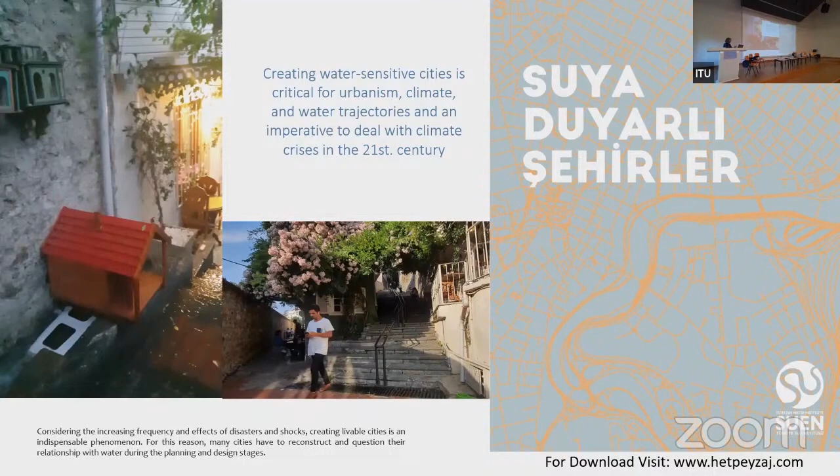What you are seeing in the middle is the street that I walk by every day to go home. This is a sunny summer day with all the begonias, the flowering shrubs opening their wonderful face, and this is a wonderful selfie spot. But as soon as the rain comes, this is the scene that we all have to suffer, or deal with, as the habitat of this built environment.

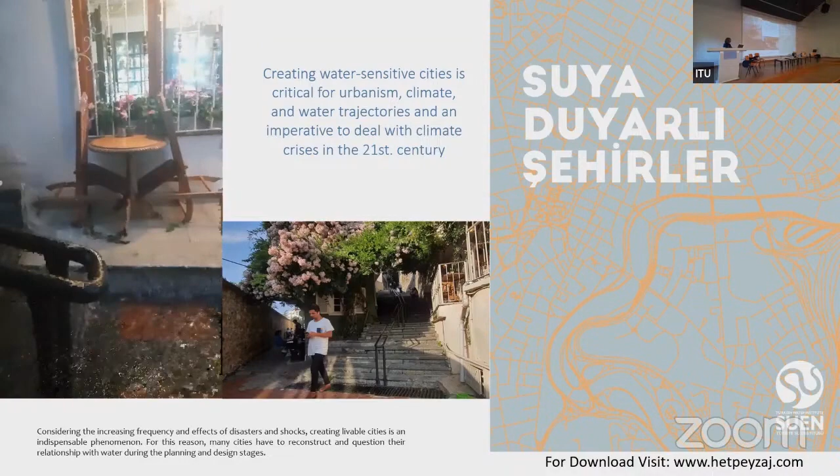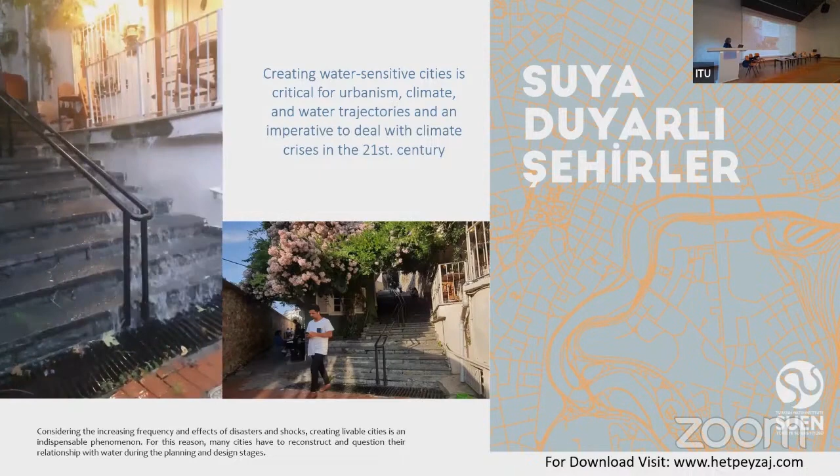So what we are seeing here is a rainy day, and what we are also watching is the wasting of a wonderful resource and incredible commodity in the urban environment, which is the water, rainwater. What we are also seeing here is the great infrastructure that modern cities, not only in Turkey but all around the world, rely on for many centuries to solve their runoff problems.

But considering the situation coming with climate change, the climate crisis, and how water is a scarce commodity these days, we need to see what's going inside of these grates as a resource, and then reverse this cycle so that we can reutilize this water again and again in a circular way in the urban environment.

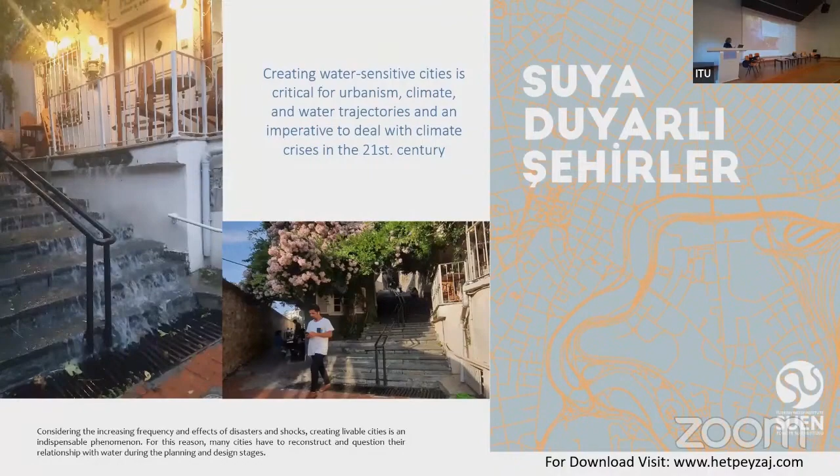This is important because cities are complex systems, where the natural and built environment is in harmony, and social, physical, and other types of conditions support each other in the city. Creating a sustainable city depends on understanding water and its relationship with water, and living in a healthier environment always creates this prospect, a progressive environment in terms of economy, social, and ecological relationships.

With the increasing effect of climate change and heavy sudden rains and long-term droughts affecting daily life and the economy more than ever, cities have to change their approach to water, becoming less on the gray side, but more on the nature-based and green side.

Some countries around the world have already developed their own scheme regarding the circular utilization of urban runoff in a more sustainable and nature-based way, and they all gave significant titles to this gesture of being sensitive with water.

For example, in China it's called sponge city. In the United States it's called low impact development. In the British sense it is integrated water management, and so on and so forth.

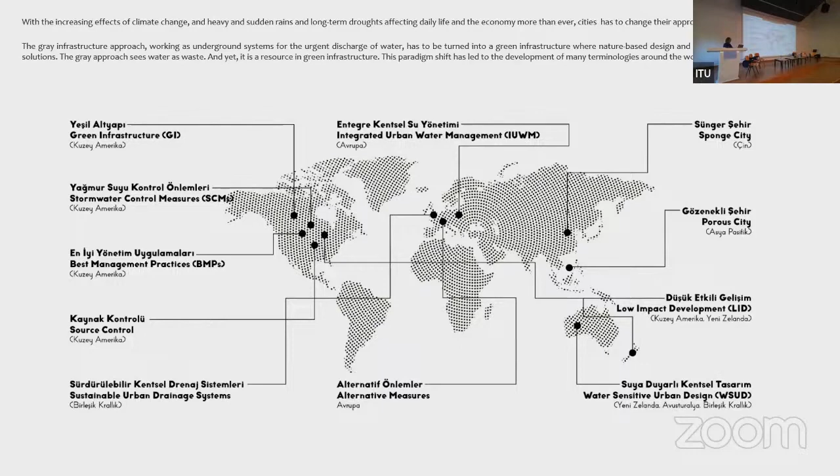So we need to come up with some form of understanding that in Turkey, we also need to be more sensitive when it comes to urban runoff.

These are examples of how the city can change the table to make the urban environment, especially the degraded brown urban environment, into a much more green infrastructure.

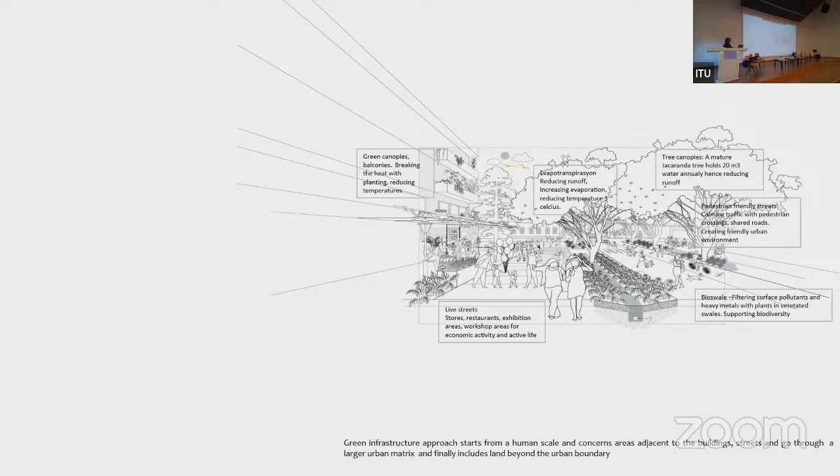It involves the buildings, the streets, and all these greenfield areas that we occupy as human beings in the city. Creating a resilient urban matrix against the detrimental effects of global warming is possible with the green infrastructure approach and water-sensitive design approaches.

You can see over here creating bicycle-friendly, not so vehicle-oriented streets with permeable materials, rainwater collection, and natural drainages.

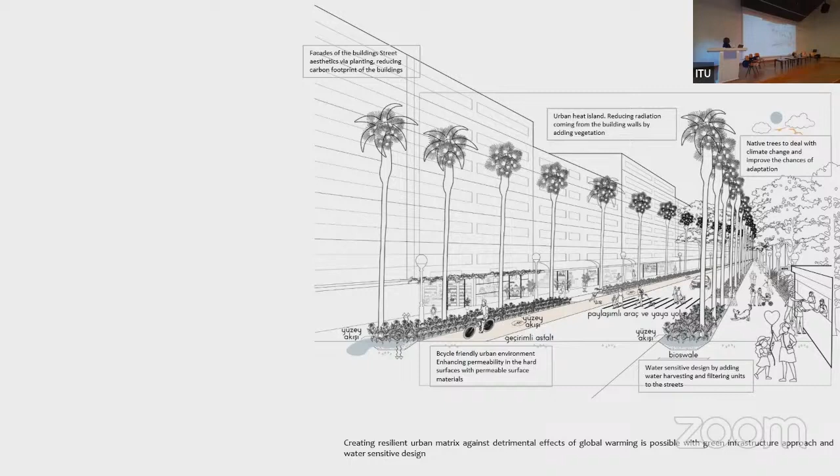And then the facades of the buildings, and the tops of the buildings with specific building materials. All of them create this circular environment where nature goes on and on in between the buildings and in between the elements of the public space.

In the climate change era, designing water-sensitive coastal systems is equally important. How fresh water and salt water merge with each other changes the city's resiliency.

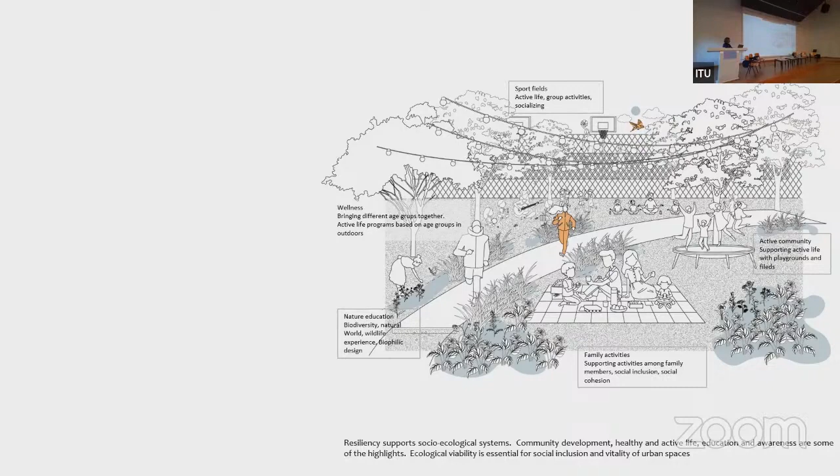We need to understand that resilience aspect not only in the sense of ecology, but also in social resilience. This is a social system also. What we design doesn't only support ecological resiliency, but social resiliency is important too.

Therefore, supporting this built environment doesn't only incorporate what's seen above the ground, but also what's below the ground is an intervention area.

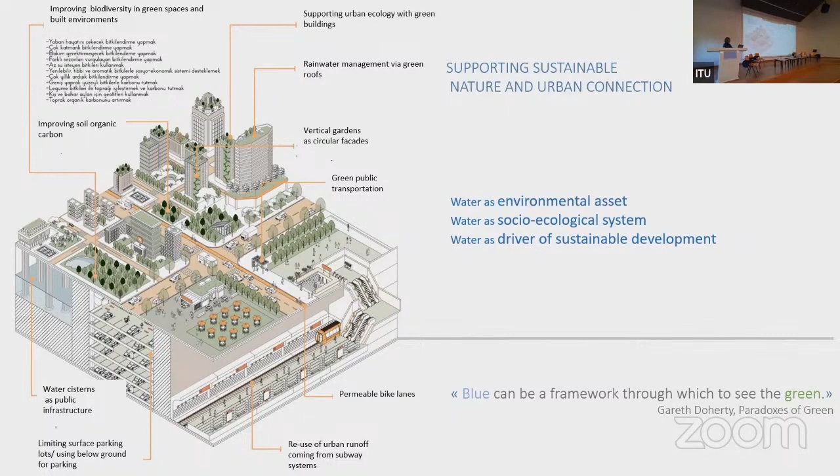Every layer in this section always involves some form of water, even in the metro lines and below the ground. So supporting the sustainable nature and urban connection relies on green infrastructure and understanding water. Gareth Doherty calls this whole system the 'blue frame,' the framework through which to see the green. So we need to put on our blue glasses when looking at the green system, because water is a driver of sustainable development, a socio-ecological system, an environmental asset, a source and regulator of this environment, a design motivation, a design input, and a design medium.

I will elaborate how these water-sensitive approaches can shape design decisions within a few real world examples that I have had the pleasure to be involved in. This is the Taksim area, with very harsh surfaces covered with granite, and the whole system unfortunately relies on gray infrastructure.

During its history, Taksim has gone through many different periods. The lifestyle, the way people engage with the Taksim area, changes constantly until nowadays. So there is this social fluctuation and human topography, as we call it, changing significantly—not only the natural topography, but the Taksim itself.

The translation, the meaning of Taksim, is 'water division.' It is just bringing water together and then dividing it to the neighborhoods of Istanbul, of Beyoğlu. The name takes its title from the Maksem building, the water division building located in the heart of Taksim, which we don't notice today, but it is there.

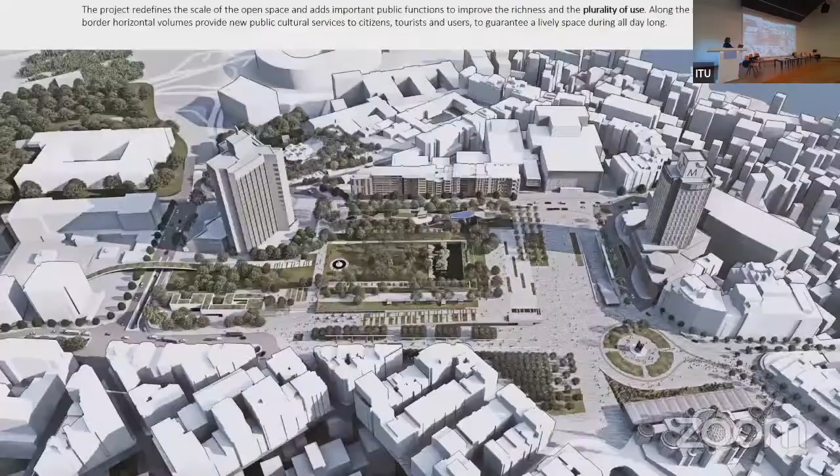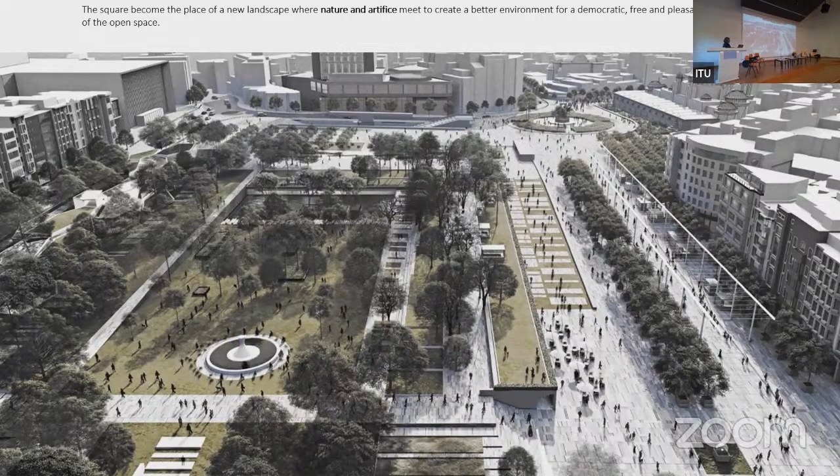Our project redefines the scale of the open space and adds important public functions to improve the richness and plurality of use. Along the new border, horizontal volumes provide new public cultural services and uses to guarantee a lively space all day long. So we were not only promoting this livelihood of activities, but also creating an urban environment that can capture more carbon than the whole built environment of Taksim is releasing.

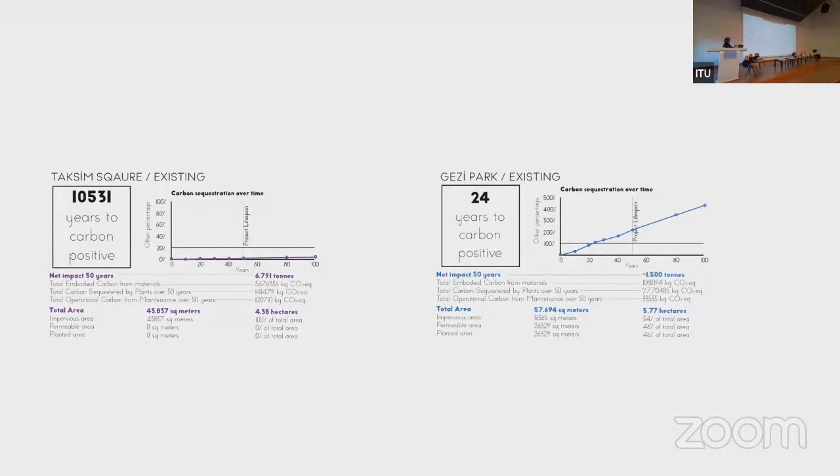The project redefines the scale of the open space and adds important public functions to improve the richness and use. What we did was measure the carbon situation and how many years, with the ongoing situation, it would take for Taksim to become carbon positive—meaning we'd capture more carbon than it releases. The calculations gave us more than 10,000 years, so it was almost like nothing. But with our design, we were able to reduce that down significantly, to almost 8 years.

So what we did to reduce this was utilize water. We use water to explain the identity of the space, which is Taksim, the confluence of the water. We proposed a scheme in the park saying, okay, even though we have to create these impermeable surfaces because this is a square and we need to protest, cheer up, celebrate, express our feelings, and socialize—millions of people will be there—so we need an impervious area somehow to hold all that people.

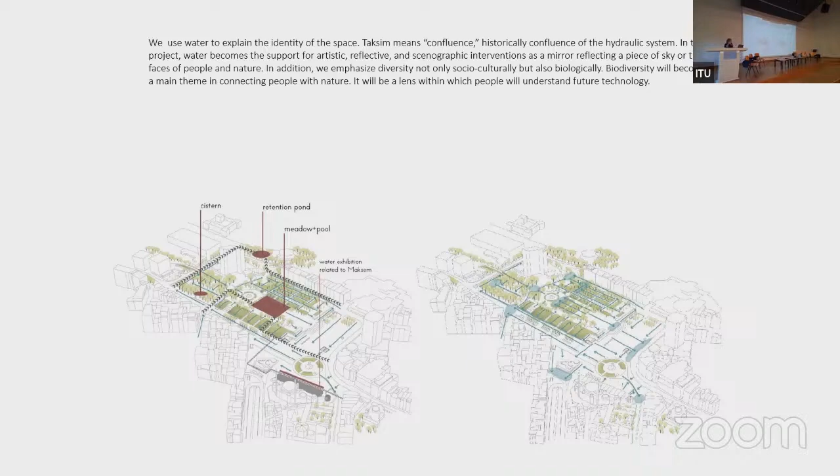But then the park right adjacent to that impervious area could be the hub of water collection, and with that water collection we can also regulate carbon sequestration. So we calculated the volumes of rain for every month and created a water reservoir area where all the surface runoff will go. In the rainy season, which is January, this whole area will be covered by water. But when it comes to July, the lowest season, that water will be inside the pool we are creating as a reflection pool.

That's kind of like paying homage to the people, because Taksim is also the area where we express our strong public feelings—so it's a reflection of our feelings onto the water in a more positive way. So this is the plan.

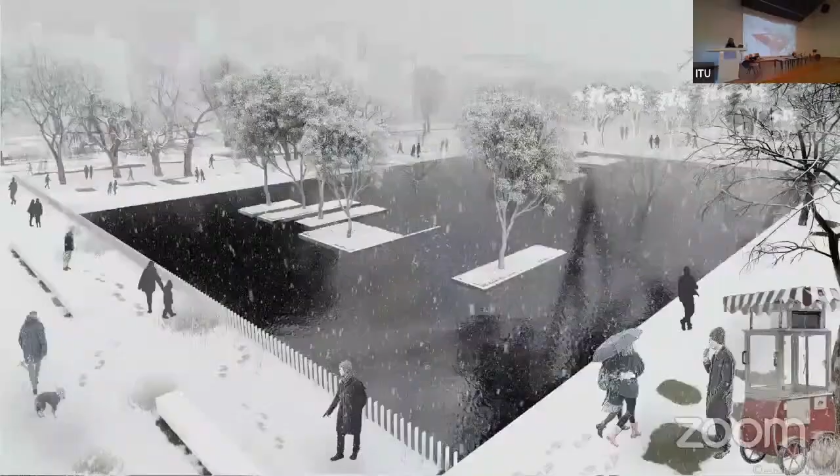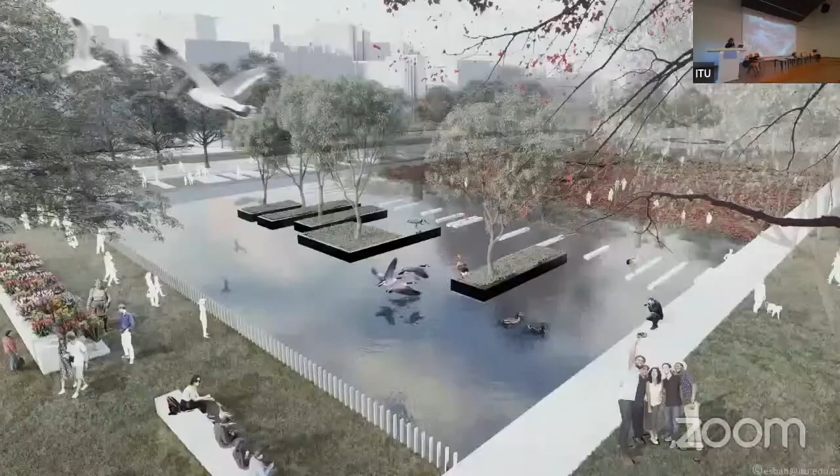This is the outcome of this whole measuring of carbon and runoff. This is the winter situation, when the site will be covered with water surfaces because we have a lot of rain, and we adjusted the size of this water surface to keep the water coming from all the impervious surfaces. When it comes to spring or the less rainy times, the water will go down towards the main area, and we will have a meadow—a wildlife meadow—which holds carbon more than anything.

So we also propose some light structured buildings, which educate people regarding the water cycle and also regarding the biodiversity in the Taksim area and in Istanbul.

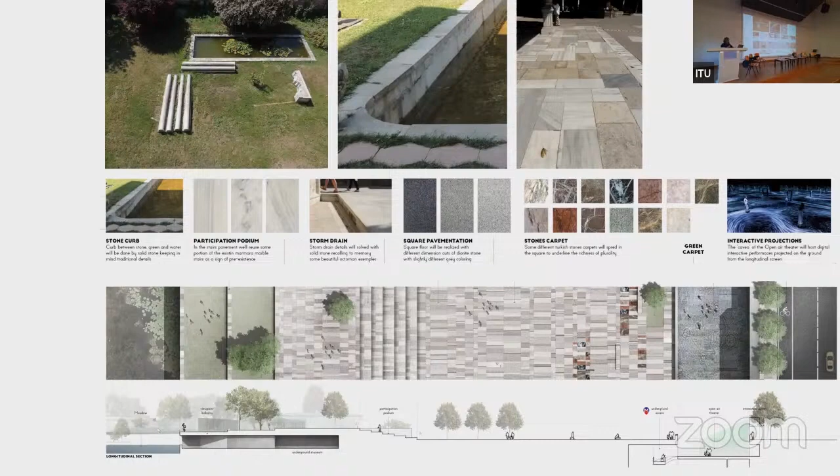Material-wise, the material language also takes its reference from the water, traditional water structures. In the Ottoman times, when you visit our historical heritage, you will notice there are different types of stones, the marbles coming from different geographies of Istanbul and Anatolia, expressing the cultural diversity and geographical diversity of the country. So we utilize that same concept to do the material work on the area.

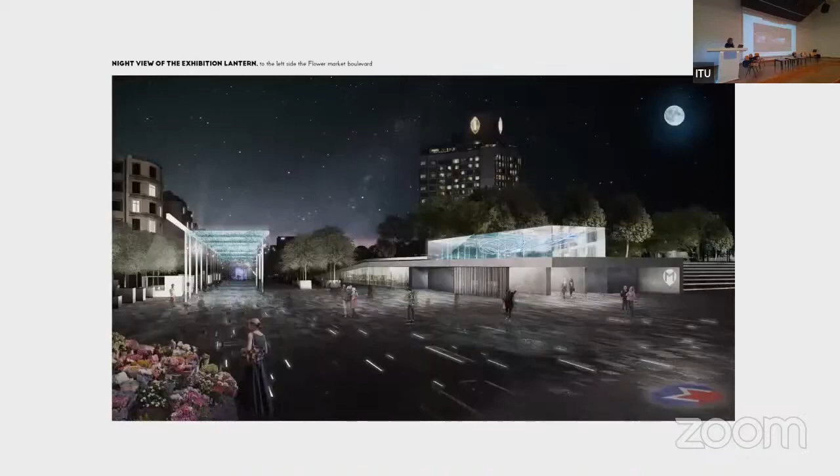So what you are seeing is like the entrances to the metro, where we are also utilizing light and the latest technology and sensors, which reflect the public's attitude in a really cheerful way, with sound and light and some sensors.

So this is an implemented project. This is a site where we are dealing a lot with the urban heat island effect, where all the grounds are sealed and the buildings get a lot of heat because the ground is very reflective. It's an asphalt, and it just hits the building.

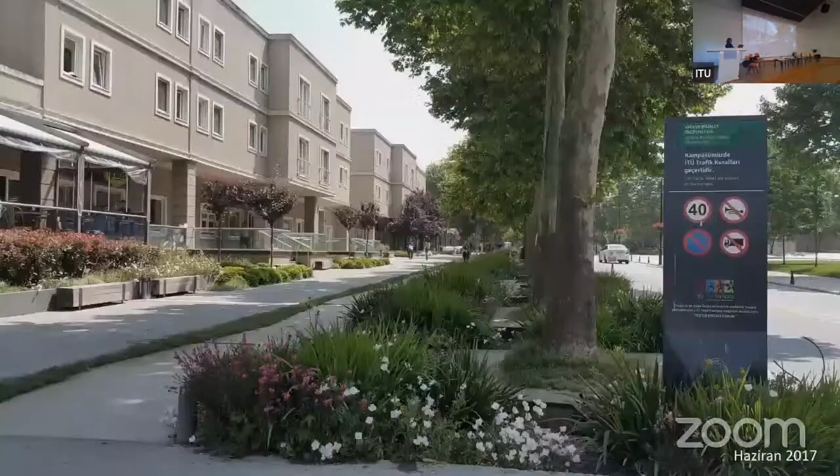This is the wintertime, and then next year the whole thing starts again. So this is before and after, and then at the end of the fall...

Water goes down to the ITU bay. And then we are using the topography to bring it to here.

There are no pumps, no electricity, nothing. It's just utilizing topography to bring it to the lower elevation, and then there is another way to fix the swale here. So that is a filter, another filter that we are putting, and then the whole thing is stored here as a reserve.

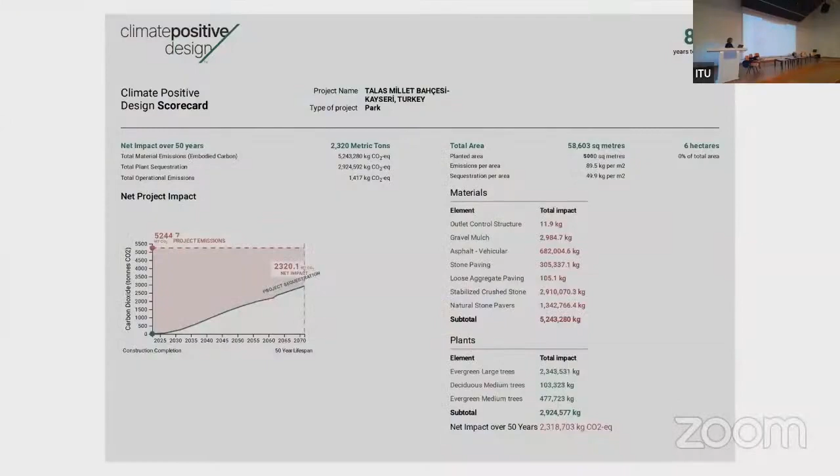Everything just collects here, and then we utilize this rainwater for the irrigation of the whole campus. So it's like, taking the positive side, that the water capturing and cleaning situation is really, really important and functional. So that's all I will say.

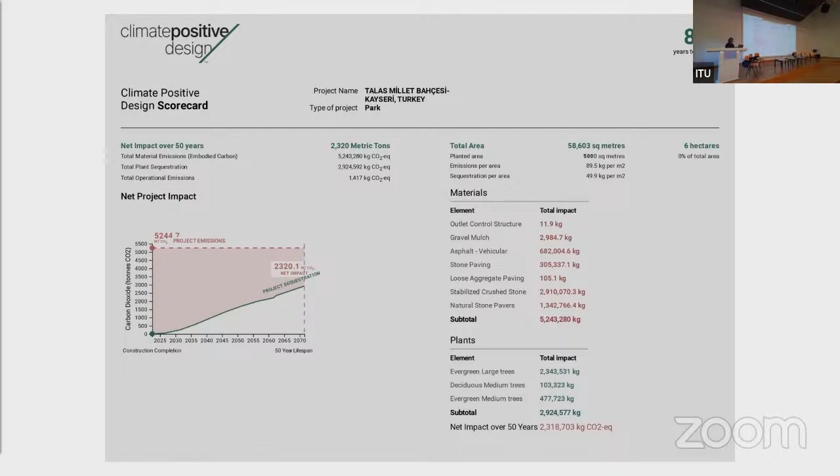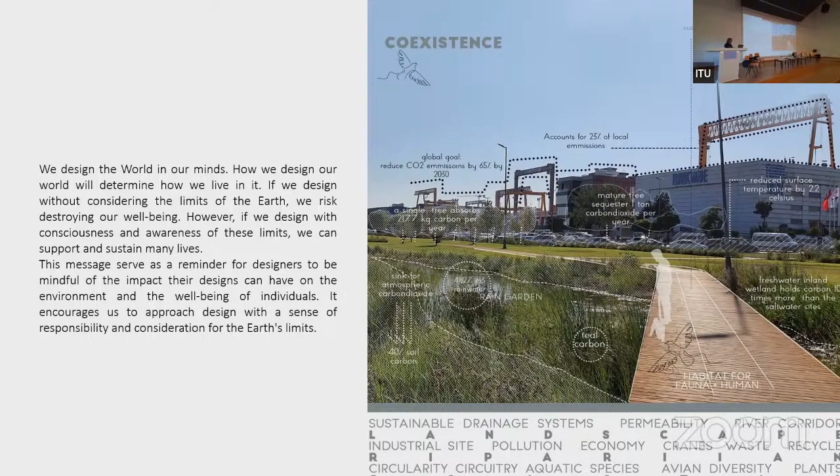What I will say as the last word is that we design our world in our minds. The way we design actually makes a huge difference. So when we design for the coexistence of people with nature and with the city, we need to be really sensitive, because how we design our world will determine how we will live in it. If we design without considering the limits of the earth, we risk destroying our well-being. However, if we design with consciousness and awareness of these limits, we can support and sustain many lives, and that is the end of my presentation.

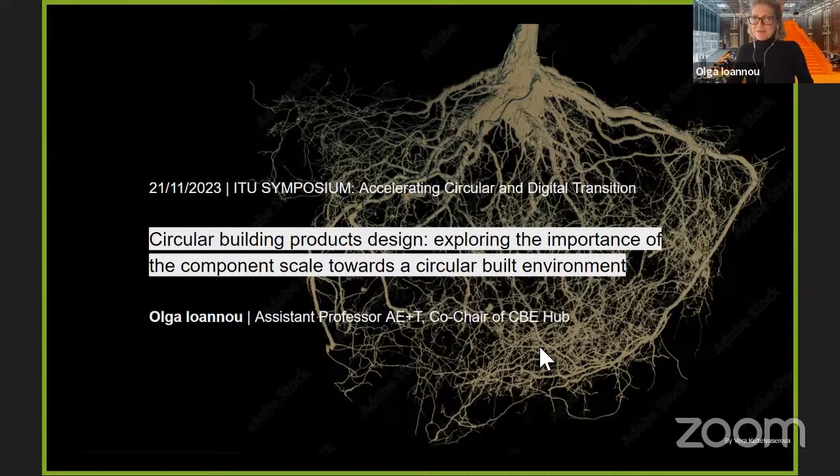So according to our emissions, all 47.9 billion tons of them, scientists have found that we need to decarbonize down to 2.51 billion tons a year, which means more or less a 96% reduction.

That would require not only the use of sustainable energy production, but also, what I claim in this presentation, a very systematic and rather systemic change.

But we are in this fragmented landscape of practices, where instead of looking at our current consumption and CO2 emissions, energy consumption, CO2 emissions, we find new ways of tackling the issue, like carbon trading. Many countries buy CO2 emission rights from countries that produce less.

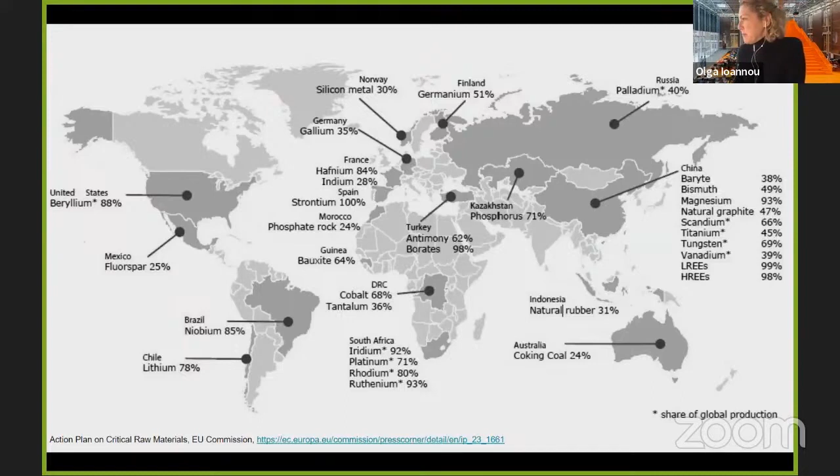This means that our decarbonizing needs in the West largely depend on mining that happens in locations other than the Western part of the world.

So what seems to be a very circular decision to use a timber frame window manufactured in the Netherlands ends up being highly dependent, highly reliant on so many different locations, from Brazil to Russia to Southeast Asia.

So there are material dependencies that obstruct our transition to a circular built environment. Currently, there are projects in the US, China, and the United Arab Emirates that require materials mined in one location, then transported to another to become components.

These materials are processed into components, and then for the fourth or fifth time, they're shipped to their final destination to become part of the project.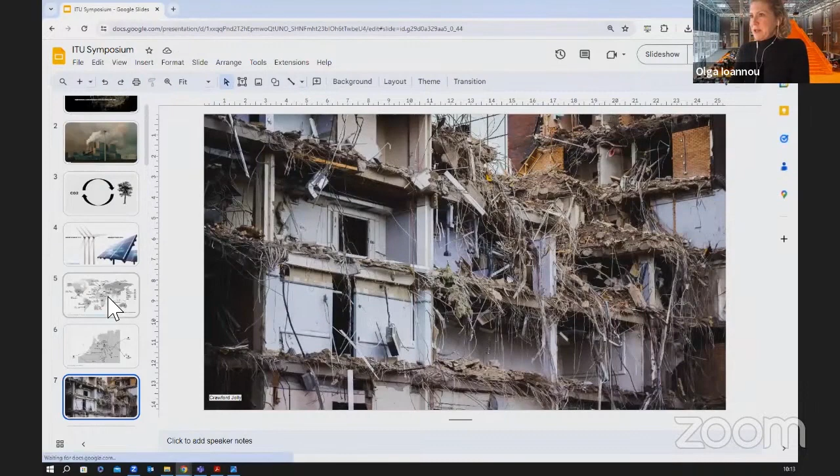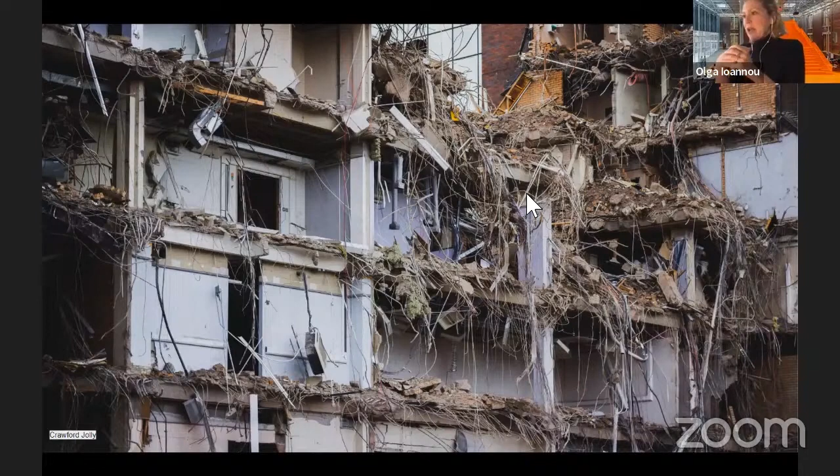Not to mention the fragmented ways we deal with waste, distributing it all over the world. I recently read that the EU has finally decided not to ship plastic waste over to countries like Malaysia or Indonesia, and instead to try to process plastic waste within the OECD partners.

So there are two major challenges here: decarbonizing on the one hand, decolonizing on the other, as a way to make this change more systemic.

Here at the Faculty of Architecture we have this group, the Circular Built Environment Hub. With this group, we've tried to create a tentative definition of what the circular built environment is, to practically describe what we mean by decarbonizing and decolonizing: trying to enable society to thrive within the planetary boundaries by closing, narrowing, and slowing down resource loops.

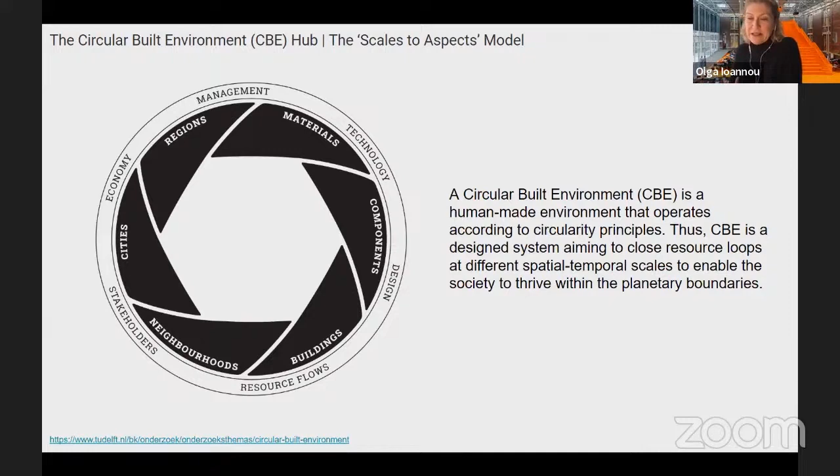What you see here on the left is the scales-to-aspects model we created, representing the scales we find relevant for the circular built environment, shown here as completely interlocked and interdependent. Around those scales is an equal number of aspects where we think circularity manifests in the built environment — management, technology, design, and so on.

One of the things we've realized over the past years of ongoing research is that the component scale, which is part of that diagram, is a very central, crucial scale to the transition. Mostly because the component scale is crucial to building-making, in the sense that materials and components will have to outlive the building they are part of. In a circular built environment, the value of the components and materials might outlive the very building, the form they make up for.

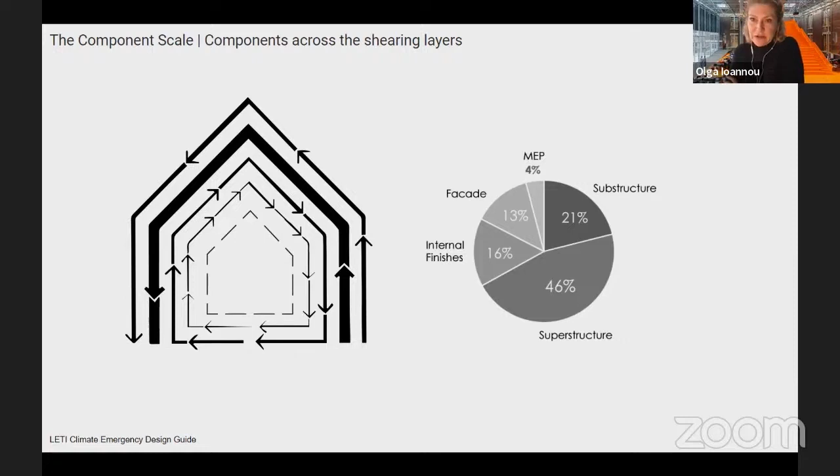And if we try to analyze the components per shearing layer, then we realize that even for a medium scale housing, there is all sorts of different parts we need to consider for a building, from the facade and substructure all the way to the internal finishes and the superstructure.

Now, depending on our strategy to make the transition of a building product or building component towards a more circular version of it, there is a number of domains being affected. And talking about systemic change, we cannot make this transition unless we set the goals, we set the ground for this transition. The domains we've identified as super relevant for the component scale are materials, design, manufacturing, and management.

Here I have this slide about setting goals, about making decisions with regards to the strategy we have in mind - to either use more biological materials and refuse the use of technical ones, or to even refuse the use of the component in the first place, all the way to creating tools like digital twins and material passports to help monitor and maintain a component properly to prolong its entire lifespan.

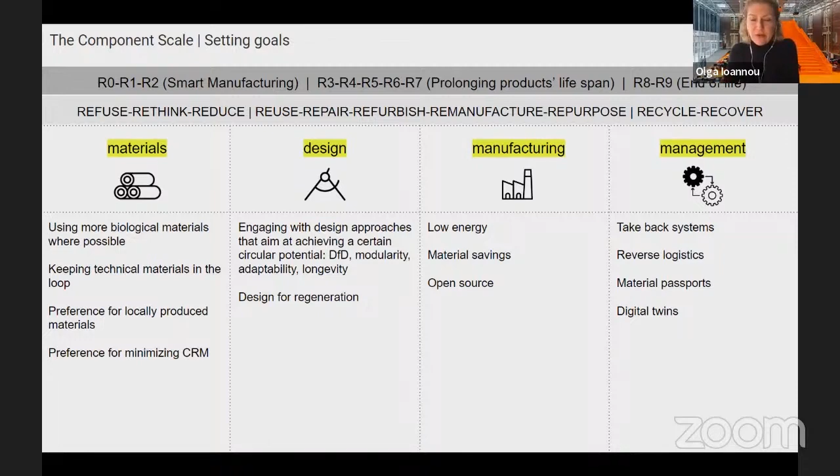But how can we make these domains more operational, with regards to how we teach about circularity, but also how we research about it? So we've turned these goals into questions, and developed what we sometimes refer to as the circular building product canvas. The canvas is composed of these four domains, and comes with lots of questions that either our students or researchers need to address with regards to making more circular building products.

These relate to the origin and nature of the materials used, but also the interfaces of those parts within a product, or the interfaces of the product with regards to how it's fixed on the building, but also how new technologies like additive manufacturing, CNC milling, and robotics can currently be employed to transition to more of a prosumer kind of user - someone who's more of a doer, who can have a lot of interaction within the activity of manufacturing the building product itself.

And of course, the domain of management looks into all these hidden systems - take-back systems, maintenance systems, or reverse logistics systems - that can help, like I said before, prolong a product's lifespan and allow for a second and third use in the future.

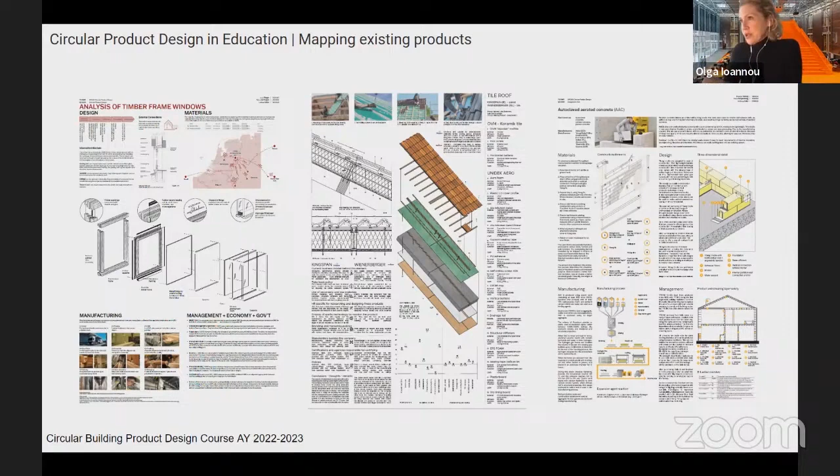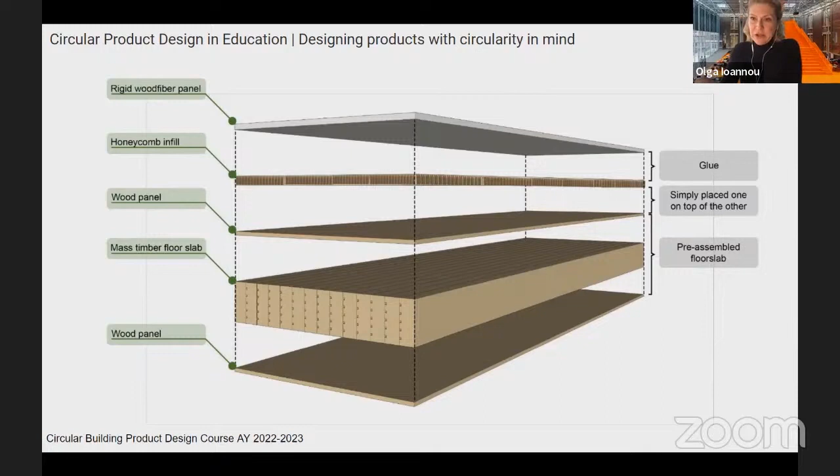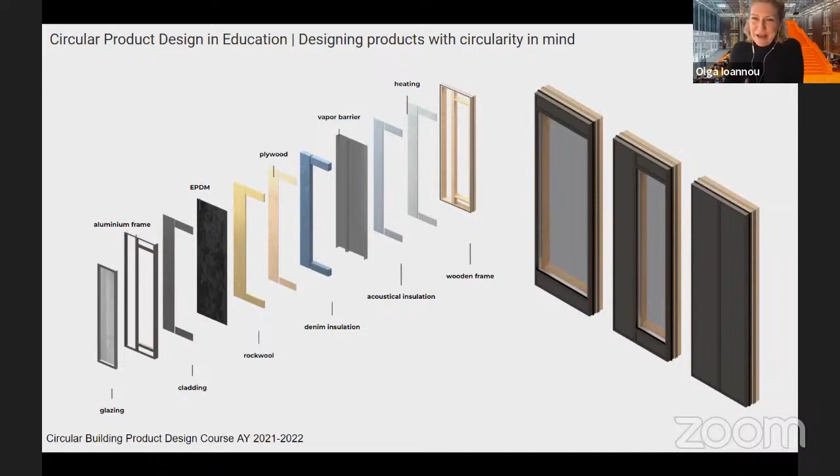And here you see different ways of delivering slabs or complete structural systems, where load-bearing walls use hemp-crete timber, or create new integrated design facades like this one here, where students need to identify the different layers within this facade and also identify the challenges of making it as circular as possible.

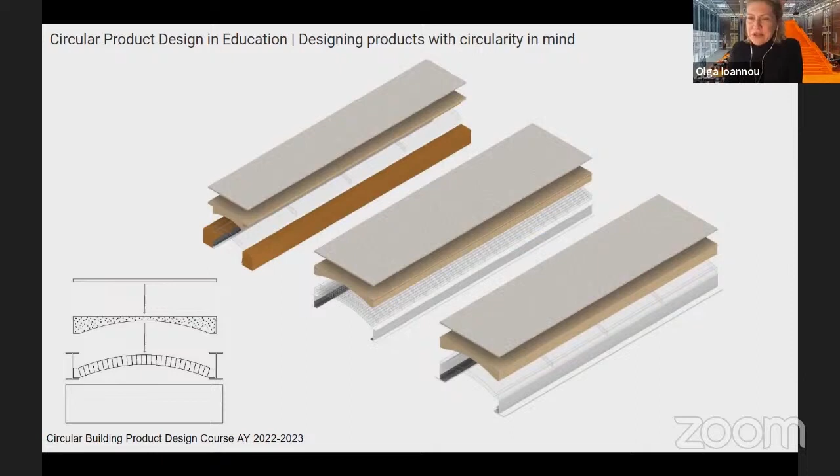The challenge is also reusing building components to produce new forms, therefore engaging in design for disassembly approaches, but also using materials in unconventional formats like bricks to create new arched slabs, for example, or by minimizing the impact of waste.

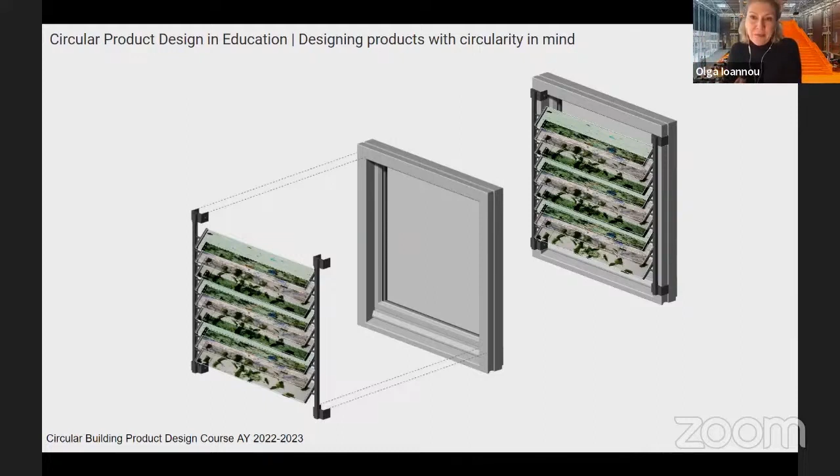There's also students looking into how waste can be turned into a resource and then aesthetically upgraded to producing something that, even if it's flawed, can create a new architectural vocabulary.

There is research currently on manufacturing techniques to minimize the number of molds needed to produce complex geometries. Here, the student has looked into this project using a bio-based material and has designed the facade element in such a way so as to minimize the number of molds needed without jeopardizing the complexity of the facade.

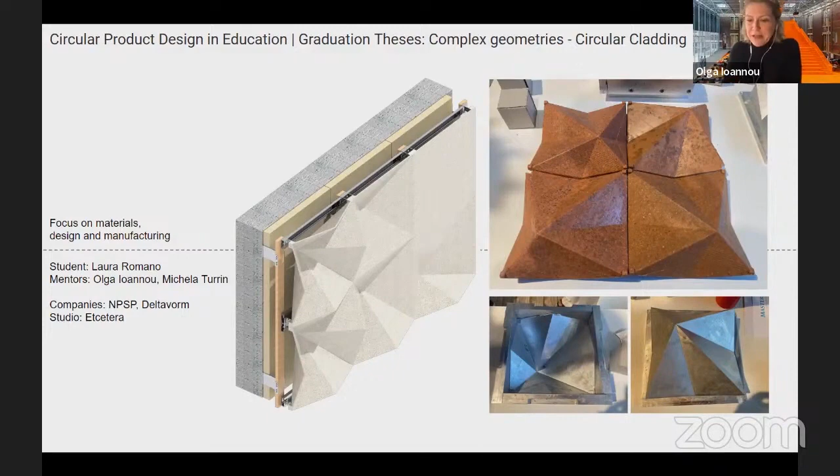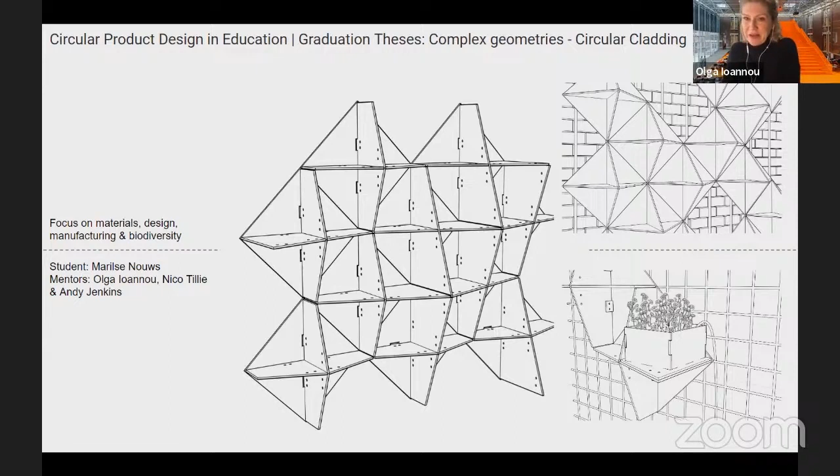There's students looking into biodiversity and how to integrate reused materials into cladding, also integrating biodiversity into it, also allowing for an easy disassembly that anybody can do by themselves.

And there are students that are currently looking into timber top-ups. There's been a recent policy here in the Netherlands to increase the number of timber top-ups in the country, also to increase the number of housing units created. Therefore, students are now looking into the possibility of structurally adding more floors to existing buildings, and what the right balance between deconstructing part of the building and adding new floors to it should be.

There's also students looking into waste produced by wind turbines in this case, making new structural systems out of blades that are no longer in use. So instead of landfilling this waste, creating crucial structural systems to integrate it in.

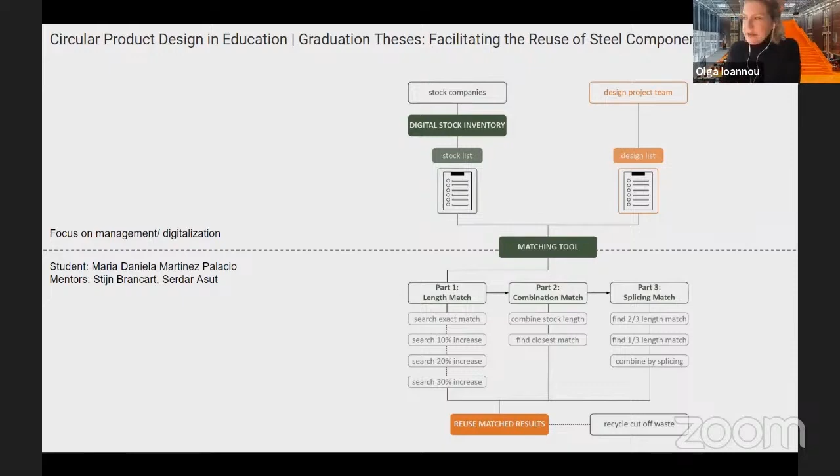And there's also students looking into digitalization and ways of making decisions about reused steel components, in this case based on their physical dimensions or properties.

And there is a number also of ongoing research projects with regards to facades and building components, and that is one of them. Juan has recently completed his PhD research, I think it was last June, on facade leasing. This is one of the most representative projects with regards to how systemic the change is.

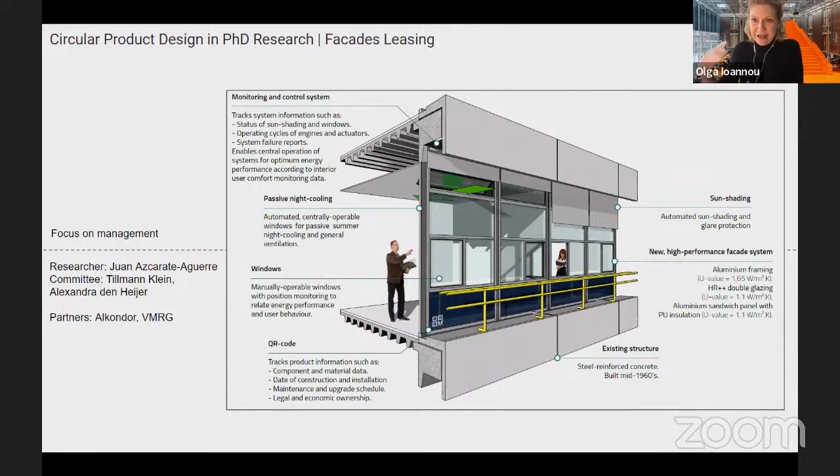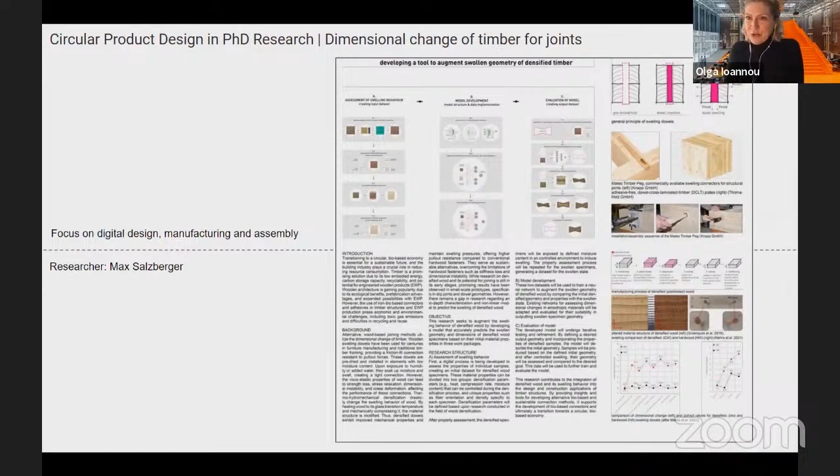There's also ongoing research with regards to timber. We also have a new timber professor here at the faculty. This is, in particular, a PhD research looking into ways of changing the dimension of timber joints by using humidity.

And there's also an ongoing research on the social aspects of circular transition with regards, again, to building products, and how communities gather around specific needs and co-create products based on resources that are directly available to them.

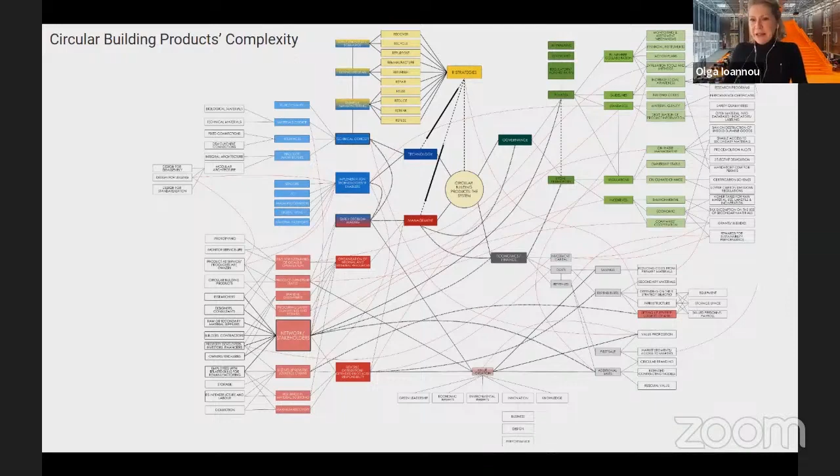The realization is, however, that there cannot be a transition to a more circular building product market unless we uncover those domains that I mentioned before, but also their interdependencies, and we make these interdependencies equally important to the products that come out of them.

Therefore, a complete reversal of the rhizomatic system, like I started and ended this presentation, showing that the process is as important as the product, and unless we actually address the complexities and the challenges of the process, we can never come to a wider

dissemination of products with a higher circular performance, with a higher circular potential. And we will remain fragmented, just like I've shown you in the first picture before. When we produced something, and maybe that is of value, but it's just a drop in the ocean of what is otherwise a major transition.

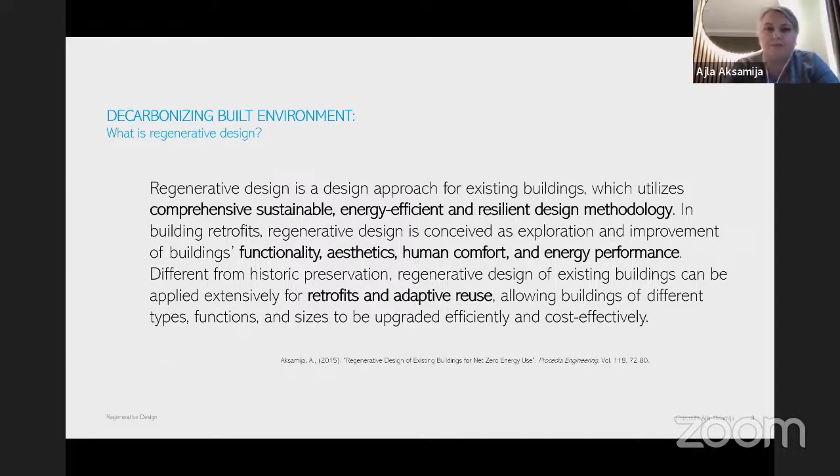In terms of resilient design methods for new construction as well as existing buildings, I typically like to talk about basic design methodologies. We always need to start with passive design techniques, considering building climate, orientation, thermal performance, shading, daylighting, and natural ventilation, and really try to maximize passive design techniques before moving on to advanced building technologies or renewable energy systems, because those are smart ways to design buildings, but also because of relative cost.

Passive design techniques do not cost any money, or they have relatively low costs compared to some advanced building systems, energy efficient HVAC, lighting systems, and so on. So we start with passive design techniques, maximizing their application on particular projects. Then we look at advanced building technologies, energy efficient lighting systems, energy efficient HVAC systems, and then renewable energy resources. This is the only way to achieve net zero energy in existing buildings, because if you simply start with renewable energy systems, we're completely missing the picture.

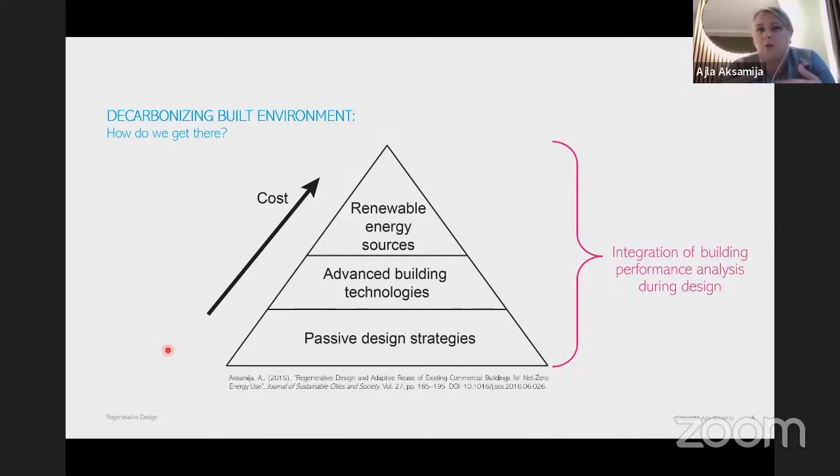Integration of building performance analysis is crucial during the design process and the regenerative design process, because we constantly need to check the impacts of our decisions, such as different passive design techniques, daylighting, shading, and improved thermal performance. We need to quantify the impacts of those design decisions on building performance, and then on advanced building systems and energy efficient HVAC systems, because if you are not integrating simulations and modeling in the design process, we simply don't know what we are doing. We do not know what the energy performance would be. So integration of building performance analysis during the regenerative design process is crucial.

Also, in terms of advanced building technologies, it is currently possible to achieve net zero energy in existing buildings as well as new construction, but we always need to consider costs, as well as benefits and risks. Integration of building performance analysis is important when analyzing advanced building systems, such as different types of renewable energy systems: photovoltaics, wind turbines, biomass heating, advanced facade systems.

Advanced HVAC systems, for particular sets of constraints associated with a single project - we might have specific benefits as well as risks that need to be considered. Again, integration of building performance analysis can help us make educated and the best design decisions that we can make.

So now, because we have limited time, about 15 minutes for each presentation, I would like to be very brief and present a case study. This case study is a regenerative design for a net zero energy academic building located at University of Massachusetts Amherst.

University of Massachusetts Amherst is located about 90 miles west of Boston, so it's a heating-dominated climate on the east coast of the United States. The UMass campus is fairly large and houses more than 30,000 students. This is the campus map.

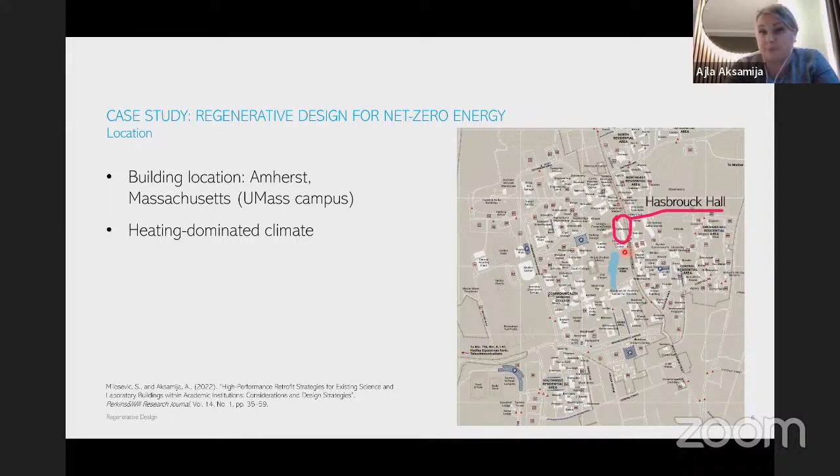The building includes an auditorium, classrooms, as well as research labs. What's also crucial is that this is the main pedestrian path and main circulation path through the campus, currently used by pedestrians to connect the east part of campus to the west.

On this side, the building has two or three floors; on this side, there's basically one level change. So students, faculty, and staff walk through this building to access the western part of the campus.

The building you can see here is a high-rise campus center, student union, and administrative building—a central location of the campus. Our challenge was to consider the existing conditions of the building and see how we could improve building performance with regenerative design.

We first looked into climate conditions to determine the right passive design techniques, understanding shading, orientation, and daylighting. On the western side there's a high-rise building relatively close, so we wanted to understand its shading potential, as well as solar exposure for a potential photovoltaic array on the rooftops. Analyzing climate and passive design techniques was the first step of the process.

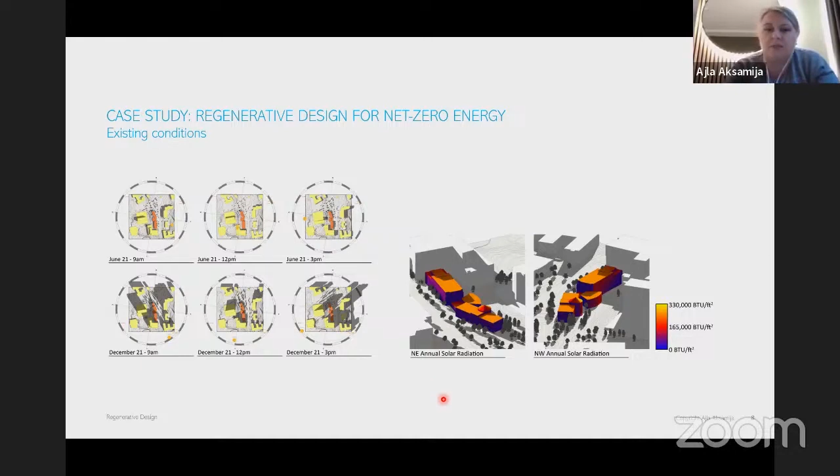Then we analyzed existing design conditions, looking into existing construction documents and conducting observations of how the building is used by students, faculty, and researchers. Interestingly, the addition building has essentially no windows—there's a glazed section on the first floor, but the research laboratories are completely enclosed. It was built in 1974, and I'm not sure what the design thinking was, but there's no daylighting whatsoever.

There's also no insulation in the exterior walls. In the original building from the 1940s, there are existing single-glazed windows, and currently students use aluminum or plastic film to protect the space in wintertime because it gets quite cold.

Circulation through this place to the western part isn't very easy or accessible, and there are also a lot of code issues—compared to current code, the building doesn't meet many requirements.

So we looked into the existing orientation, programming, planning, and use and functionality of the space, and proposed better, improved regenerative design strategies. This axonometric shows the regenerative design strategies that were used.

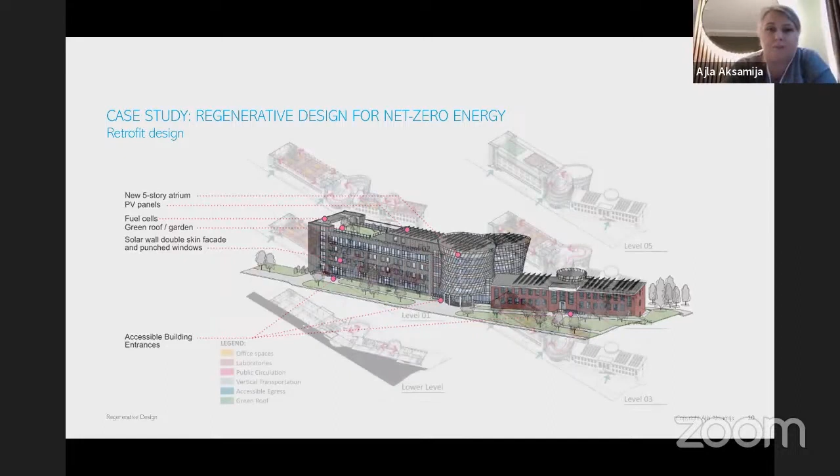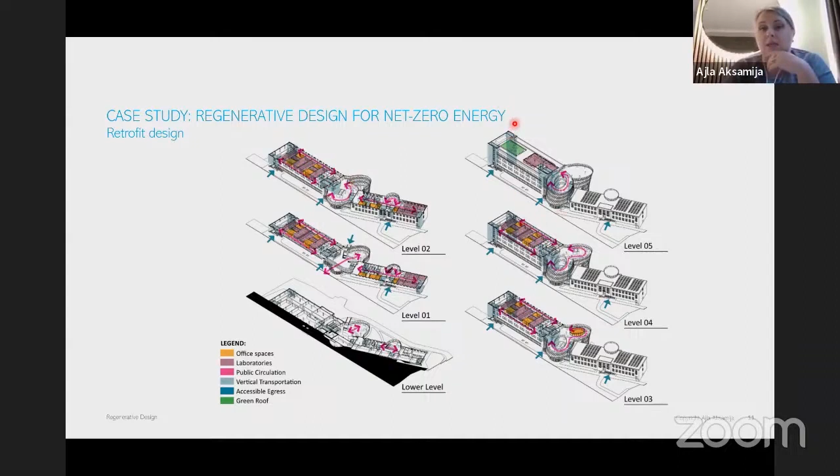Here are diagrams showing different levels and improvements in circulation and reprogramming. We pushed research laboratories to have access to daylight, and you can see circulation through the atria and connection to the campus.

We also modeled the energy usage of the building under the current design and compared it to the actual energy consumption data. We then conducted energy modeling of the retrofitted or improved design. The initial simulations gave us an EUI, or energy usage intensity, of 139 kBTUs per square foot—I'm sorry this is in imperial units.

The actual EUI was a little bit higher, 154. And we always have to take results of simulations and modeling with a grain of salt - it's highly unlikely that we will get 100% correct simulations. When we improved the building performance with the retrofit design strategies, our EUI was 126.

We also conducted thermal imaging of the building facades. As I said, winters in the northeast US can be quite cold, so this shows thermal imaging in January. I mentioned that the addition building built in the 1970s is basically just concrete and brick facing - no insulation, no windows, very poor performance. The existing building built in the 1940s had some insulation and exterior solid walls, but the windows were pretty problematic.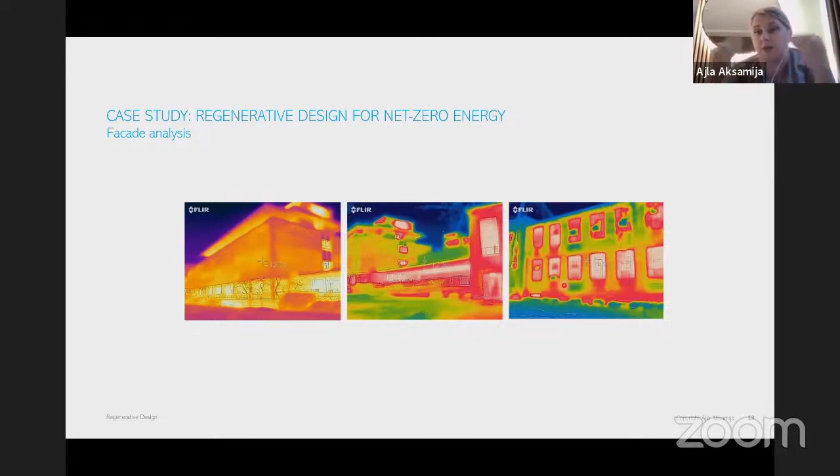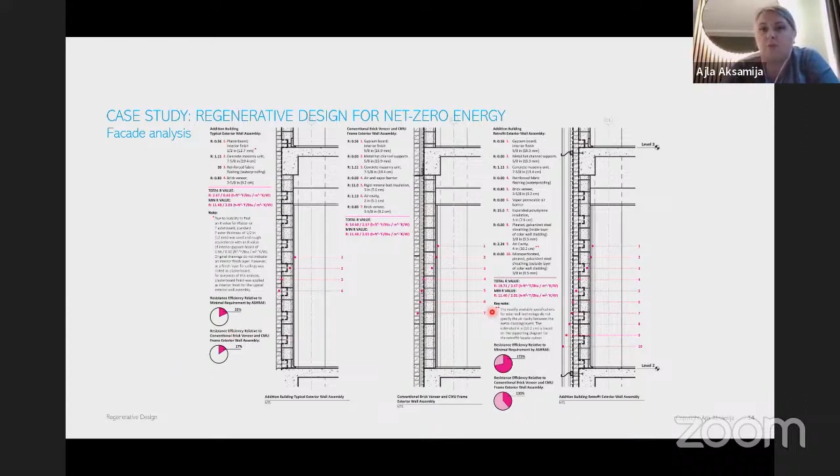So we took a closer look into building facade components and existing conditions, and redesigned the facades to be more energy efficient, including addition of insulation layers, high efficiency windows, and solar wall systems - a passive design technique for preheating air for heating systems. This also includes one of my other research projects, a smart facade system called thermal-electric facade that integrates smart materials and, based on the temperature gradient between inside and outside, can generate heating, cooling, or electricity for interior usage. You can see here details of the facade components, respective R values, and investigation of thermal performance.

We also analyzed heat transfer in windows, framing, and condensation potential, and here's the redesigned system with addition of new facade to the exterior.

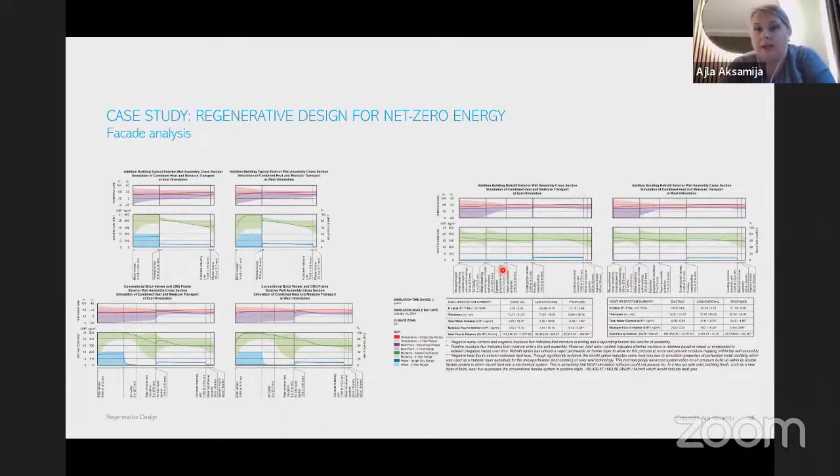We also performed analysis on where to place insulation - on the exterior or interior of the wall system - and the question of condensation potential. So we performed simulations and modeling to understand hygrothermal behavior in solid facade elements. These graphs and charts show dew points and calculations for condensation potential in original facade systems as well as redesigned and readapted facades.

The major passive design technique was to improve building envelope performance by adding insulation layers, solar wall system, and thermoelectric facade where possible. In terms of renewable energy resources, this includes photovoltaic panels on the rooftop, but also PV glass in the atrium where appropriate, triple insulated glazing systems for windows, and fuel cells as another renewable energy resource.

So you can see how a relatively typical research laboratory building, the kind found on this particular campus or many other campuses across the US and the world, can be analyzed, retrofitted, and regenerated to improve energy performance, human comfort, and meet net zero energy goals.

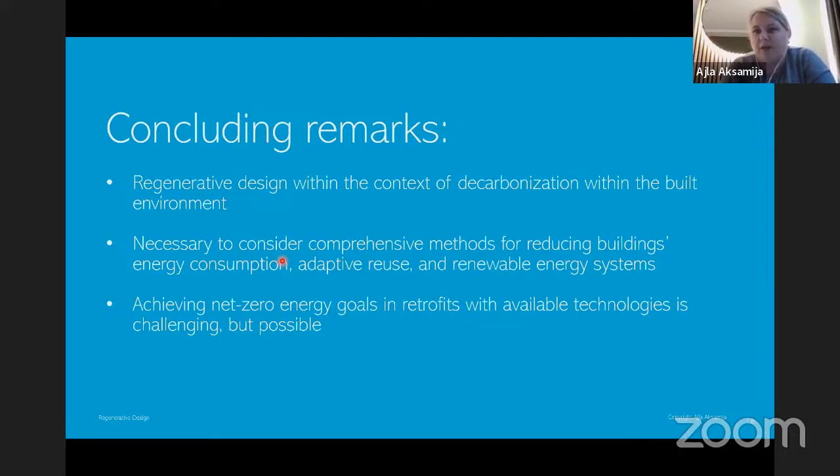ITU colleagues invited me to give a talk about bamboo-based composite materials. Last year, 2022, we worked together successfully and secured this British Council project, and it's my honor to host a visit for the delegation of my team to Edinburgh Napier University, where together we built some small bamboo timber bridge models. So we hope next year and later on we can maybe continue the workshop here in Istanbul. Sorry for maybe skipping the poster design.

My topic is on bamboo-based composite structures as well as composite materials for construction. I'm looking into the developments of bamboo timber composite and bamboo composite beams. My background is structural engineer, and I'm looking into circular design and sustainable materials from different angles.

Before we go into the details, I'd like to talk about the opportunities and challenges for our civil engineering and construction industry. As we all know, the construction industry accounts for 30% of CO2 emissions globally. Decarbonizing construction and building a new net zero industry plays an important role in achieving the UN's sustainable goals. So to fight this challenge, the construction industry now has a chance to move into bio-based construction.

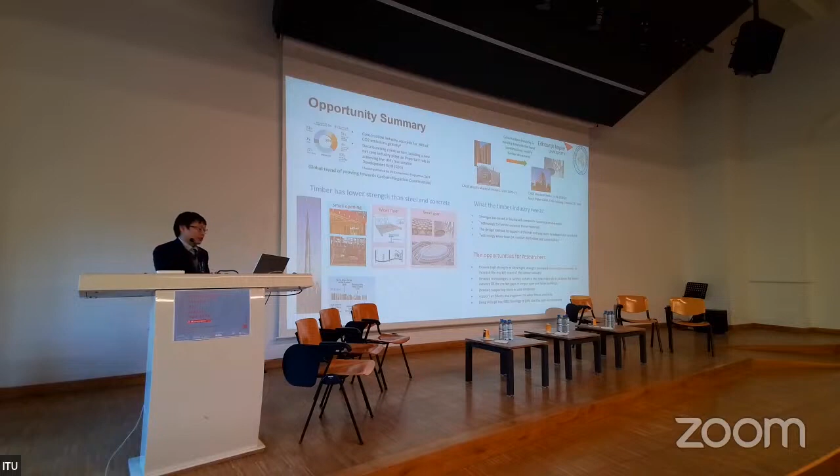This also provides opportunities for us as researchers - how can we provide assignments for users? Again, bio-based production materials increase the market share of the timber industry, and we can develop technology to further enhance this material, as well as supporting services and a toolbox to help conduct design. For us, we can also use this knowledge and new ideas to secure large research and development funds, and create spin-off companies. So this is the challenge and the opportunity for researchers.

So people will ask: there are a lot of different types of bio-based materials, why choose bamboo? And later I'll mention why choose composite for bamboo. So why bamboo? Because the bamboo we are using in this research is not raw bamboo, not a circular bamboo form, it's actually engineered bamboo.

The bamboo is split and planed into long slender strips that are glued together to form this timber lumber strip of material, which you can then use as timber. This engineered bamboo has very high strength compared to timber, and it's also light, so you can use it quite efficiently, and it's low cost. Bamboo was famous as the 'poor man's timber' in the past, but not anymore, because now it can create really beautiful structures, even for commercial or high-end use.

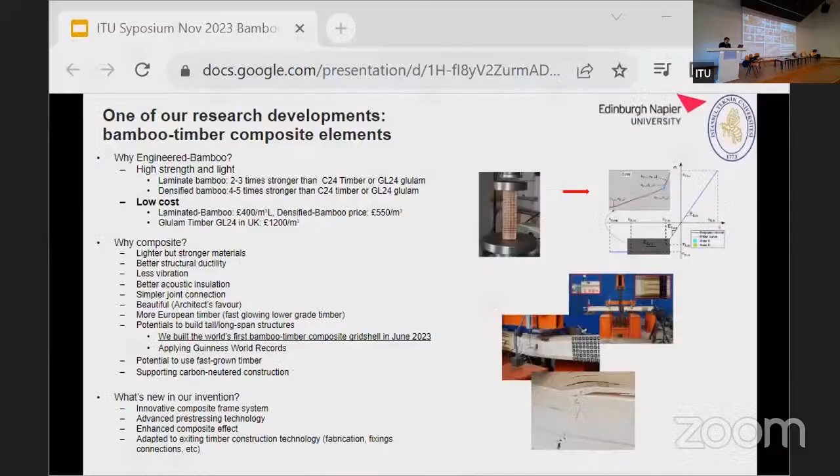So to do this, what we can do is actually force laminate the different components that are typical and different, with different architectural geometry properties - like if they have different curves or different lengths - and then force them together. Once you release this press, the parts will interact with each other to create a pre-stressed state inside the member itself.

If this pre-stress counteracts the external load when you apply it, you may get a benefit - you can increase the strength. Also, we can utilize materials more, so every material can bear stress better.

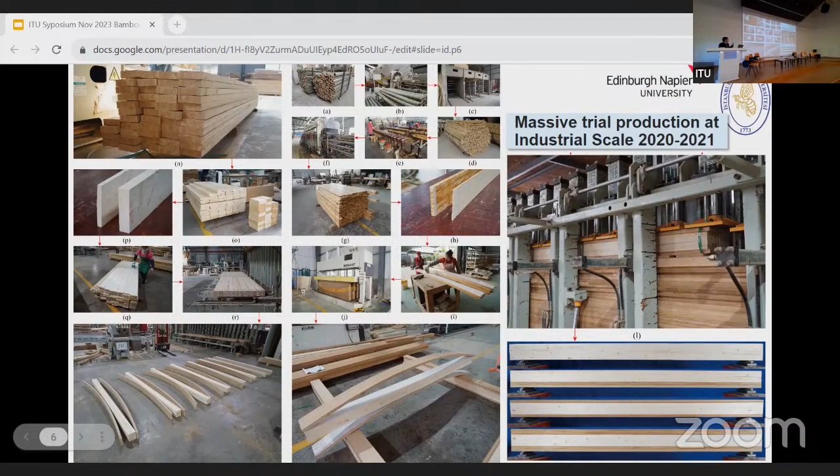This is how we did it, and we also proved this technology is scalable. We can use existing industry facilities, slightly modifying what we call the compression technology, and then we can achieve these feature manufacturing processes quite easily.

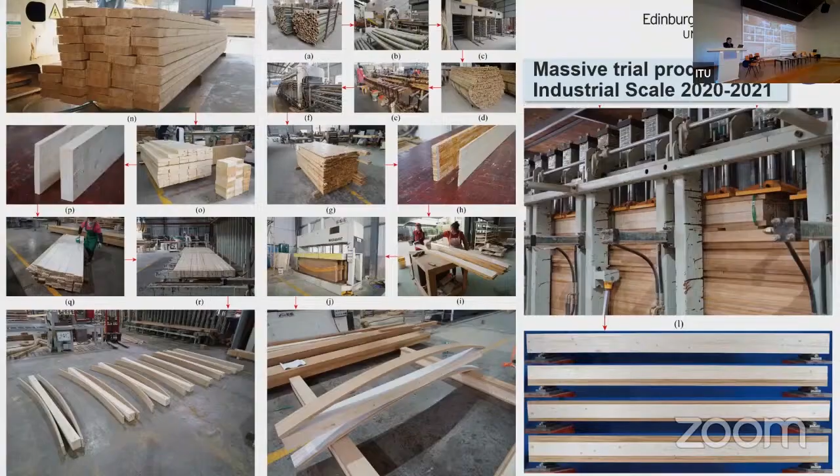Okay, so we also conducted investigation on these materials, and then we got some interesting findings from our work.

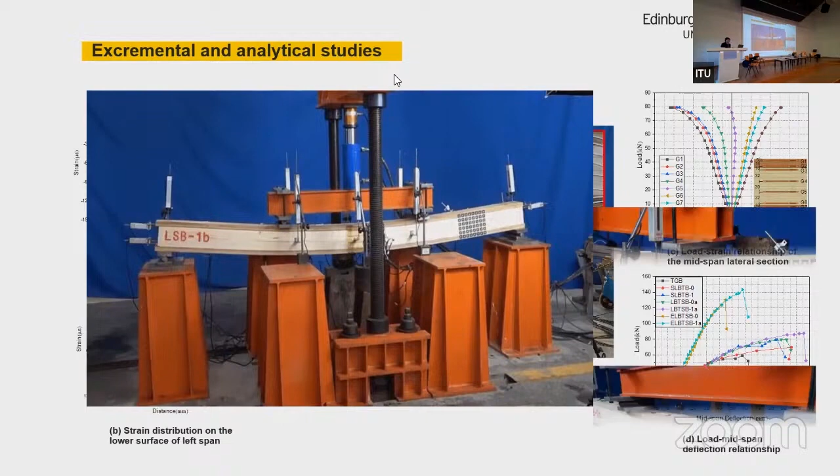This is supposed to show the last moment before the structure breaks - the moment where the structure actually fails. As you can see, there's an interesting finding we discovered, recorded here for the first time.

You can see the top photos - while this structure fails, there's a very interesting curve at the top of the beam next to the loading point. The timber and bamboo curve at this level, which is delamination in the compression zone. It's very interesting - in fact we need to look into why and how it happened.

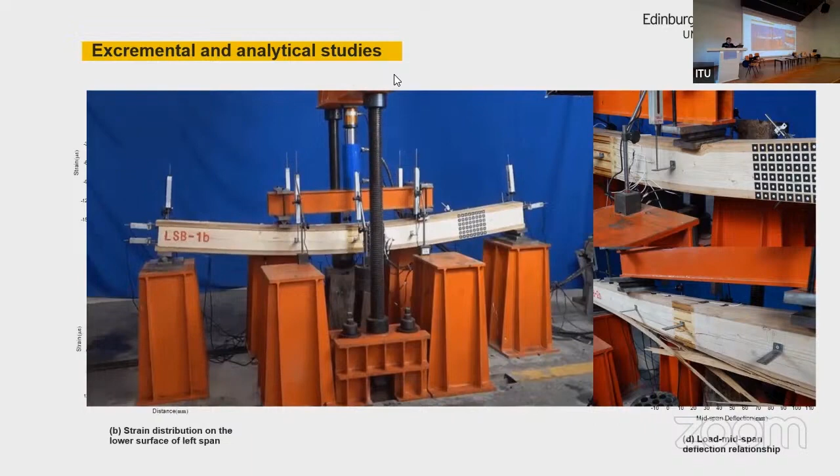Also from this, you can see at the bottom - normally the first failure is at the top in compression, but after that the bottom, the tension level, also fails. So this is some effect we found.

The key finding from our work is that we proved this technology can be scaled up using industry facilities. We also looked into different failure categories, connecting this failure mechanism to the layout of the cross-section and parameters such as the laminate and timber linkers. We also did an in-depth component analysis using data gained from the strain gauge and other measurement facilities.

So we've concluded several new assumptions for further study. First, we confirmed that plane remains plane section, which is the fundamental theory for classical analysis - it still remains plane and is still valid. Second, the cross-section's neutral axis moves during loading at different stages, so this needs to be considered in further analytical or numerical analysis.

The last one: the actual stress and strain from the composite materials - you can combine the intrinsic stress together with the stress caused by external loading. This is accurate, so this is a superposition - you can put them together. We call this maybe a principle of superposition as well.

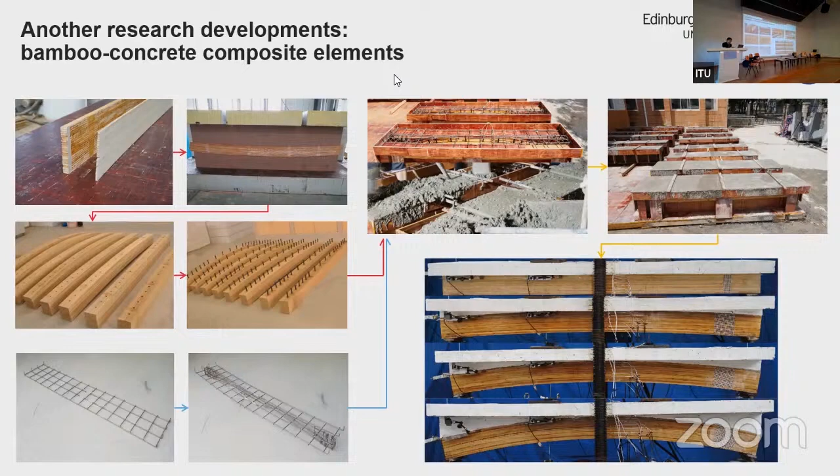So this is the development we have done. Now I'll talk about the detail, similar to before—the design parameters for both the linear straightening and the curving types are different.

This is the test setup and some findings. One very interesting finding is that the dowel connection in these mechanical laminated structures is not very effective, because you can see in a very early stage the deformation along the beam, shown in figure A.

They actually even out—they deform at the same position, leveling out. So all the deformation in the beam, between the concrete and the bamboo, moves together, which means the interlocking effect is not behaving very well.

We can also notice from the strain reading and the difference between strains that the jump between this gap starts very early.

When we analyze this structure, the result is quite reasonable because you can see the blue area in figure C, and the slope under and slope above is actually the profile you'd get if you have a fully composite effect, in a series analysis, versus what is the strength like with no composite effect. Our test result falls in between, so that's actually quite a reasonable result.

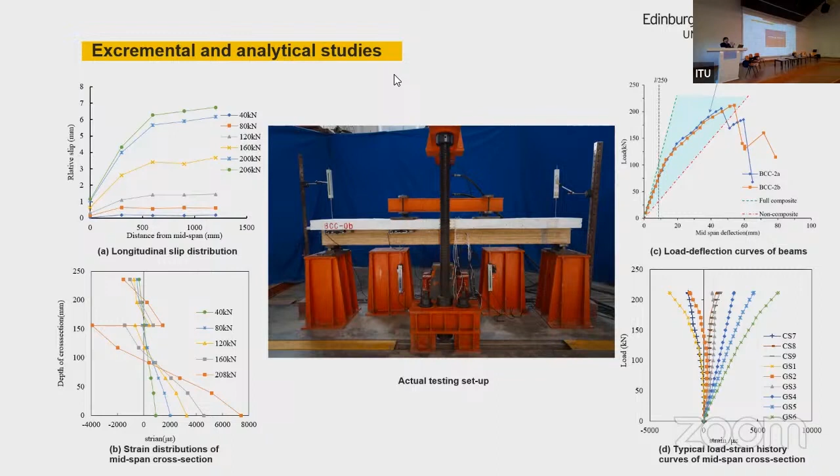For the last figure, you'll also notice that the neutral axis is moving all the time during loading because of the mechanism, and the failure interaction develops progressively. At some stage, the strength comes back, so this is some very interesting information.

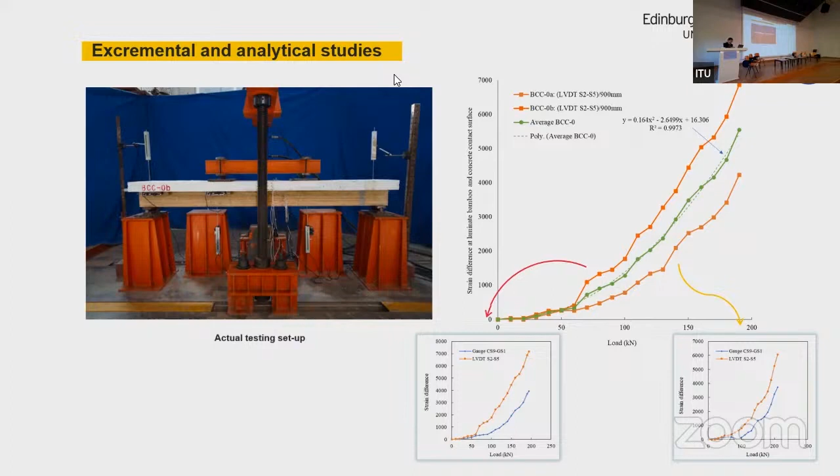We also classified all the failure mechanisms. The main mechanism we found, no matter straightening or curving, is actually shear failure between the laminated layers. They fail there—once that fails, it's a sudden, brittle failure, and once that happens, the beam splits into two beams and fails instantly afterward.

Finally, the method we use to measure the layer slip is much more efficient than the span values. So that's my talk—thank you so much.